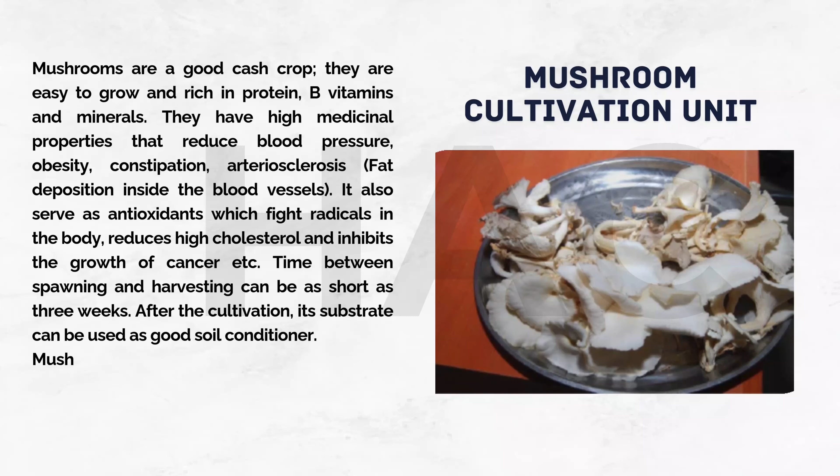Time between spawning and harvesting can be as short as 3 weeks. After the cultivation, its substrate can be used as a good soil conditioner. Mushrooms are the richest source of vegetable protein.

Photography and Media Unit. Photography and media is a skill that deals with people's life. It gives details of happenings around the world through pictures and videos. As a business entity, it covers any event and keeps record of them. Few among the activities under this media unit are photo shoot, video coverage for any event, photo book and photo frame production, newscast and documentary production.

Textile Design Unit. This unit is saddled with the responsibility of training students on screen printing and production of tie and dye materials for sale within the school community. Textile design is diverse and has many branches such as resist pattern cloth, tie and dye, batik and adire, screen printing, reverse applique, quilt making, patchwork, garment making, tailoring and spinning, knitting and woven fabrics.

This unit also produced Kampala for staffs, batik for Wapoga Games, souvenirs for Texas Tech USA Tour, USAID/Winrock programs, printing on departmental lab coats, and other screen printing contracts.

Crocheting Unit. This unit trains students on skills in making cardigans and other related wares. It also contributes in the generation of IGR for the Polytechnic at large through its production of customized school cardigans for staff and school pupils. It promotes self-reliance as students that have adequate knowledge of it can easily establish themselves instead of remaining idle, thereby waiting to acquire government jobs.

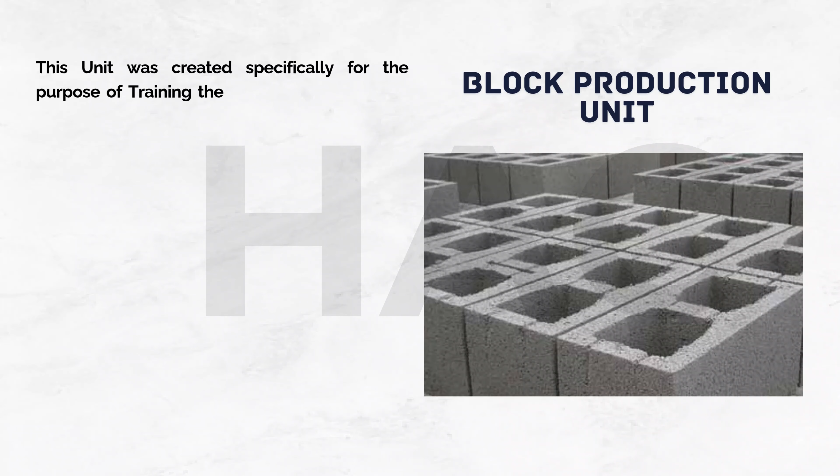Block Production Unit. This unit was created specifically for the purpose of training the students in the aspect of block production for sales, with the view of making them self-employed in the nearest future. It equips the students with basic skill to build up their practical experience in the aspect of proper molding of blocks that will always stand the test of time.

This block production unit, if given adequate financial backing with some fundamental management regulations put in place, can be a good source of internally generated revenue, IGR, for the Polytechnic at large. This is achievable if the underlisted measures are well established.

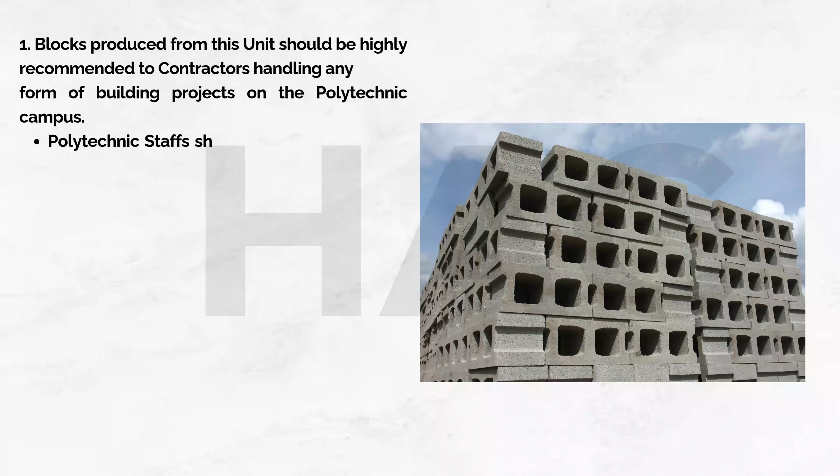Blocks produced from this unit should be highly recommended to contractors handling any form of building projects on the Polytechnic campus. Polytechnic staffs should be encouraged and allowed to patronize the Polyblock with a flexible mode of payment to attract more customers.

A delivery tipper van that can efficiently load sand from the bush should be procured for this unit. This will give the unit free access to source and transport sharp sand materials freely instead of purchasing it at high cost from local suppliers. This will greatly reduce the overall cost of purchasing sharp sand for the production, thereby enhancing our profit margin.

Olusegun Obasanjo Center for Engineering Innovation. The center was established in 2002 as a center of excellence by the then Education Trust Fund (ETF) to make great impact in the world of engineering technology.

The completed project was commissioned by the then Honorable Minister of Education, Professor Babalola Borishade, on the 16th of May, 2003. The sole objective of the center was to copy and transfer technology at all levels, produce equipment and machines by using a larger percentage of locally sourced materials, thereby promoting homemade products.

Students' industrial training is also of paramount priority to its objectives. Olusegun Obasanjo Center for Engineering Innovation was born out of the need for making engineering practices closer and available to the people. It was named Center for Engineering Innovation in order to cover a wide scope in the field of engineering practice. It inculcates engineering practices and ethics into prospective students and trainees towards quality delivery of engineering products.

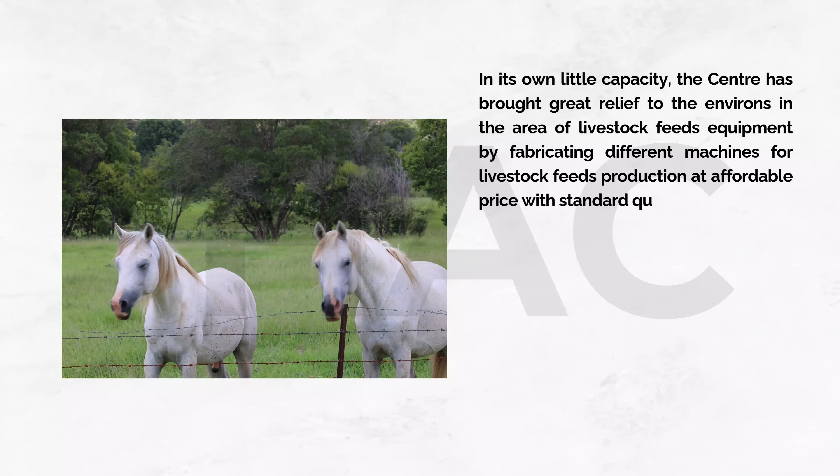Among the livestock feed processing machines that can be and has been successfully fabricated at this center are listed below: feed mixer machine, vertical and horizontal, hammer mill machine, pulverizing machine, pelletizing machine.

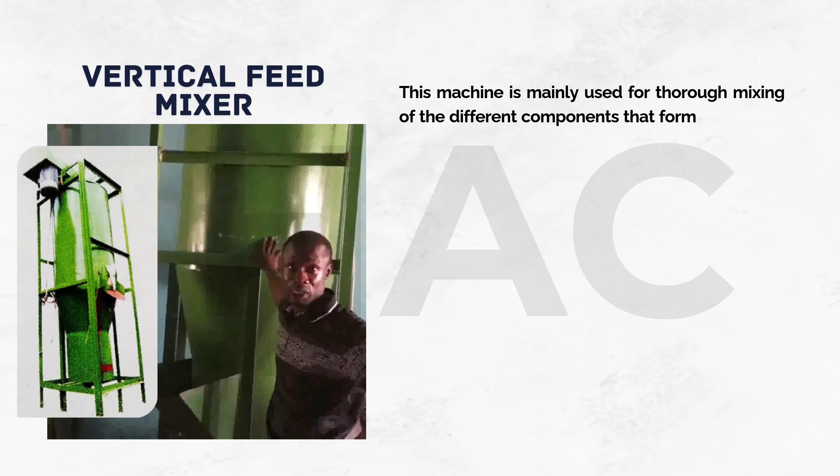Vertical feed mixer. This machine is mainly used for thorough mixing of the different components that formulate both fish and livestock feeds.

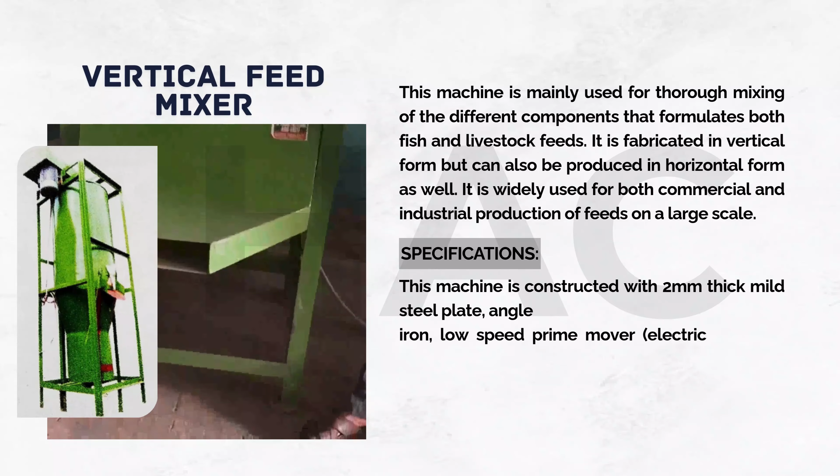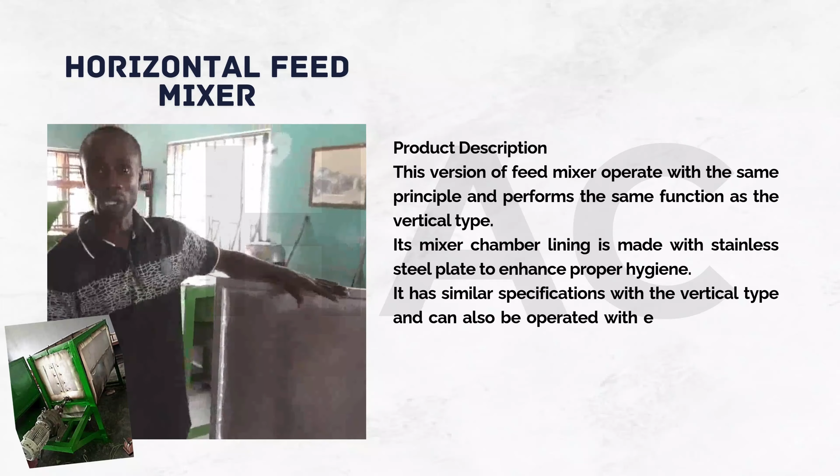Horizontal feed mixer. This version of feed mixer operates with the same principle and performs the same function as the vertical type. Its mixer chamber lining is made with stainless steel plate to enhance proper hygiene. It has similar specifications to the vertical type and can also be operated with either an electric motor or a petrol engine of required power rating.

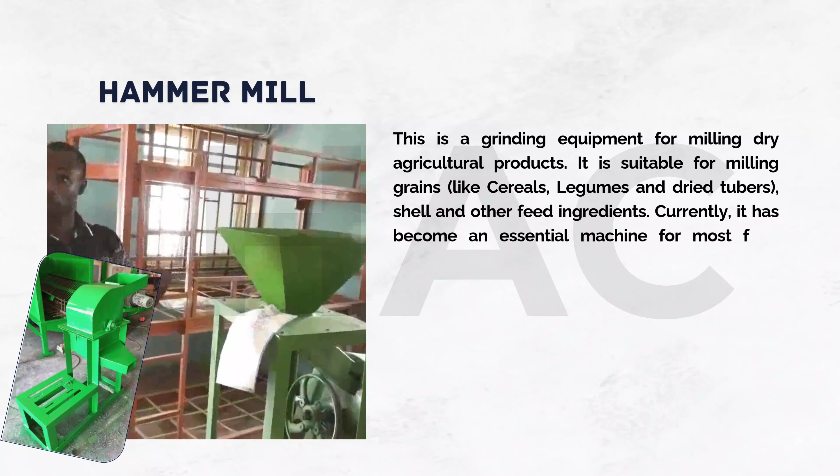Hammer mill. This is a grinding equipment for milling dry agricultural products. It is suitable for milling grains like cereals, legumes, dried tubers, shell and other feed ingredients. Currently, it has become an essential machine for most feed factories, powdered food producers, etc. This machine is fabricated with 8 mm thick mild steel plate, angle iron, square pipe, etc. Its production capacity is 5 tons per day.

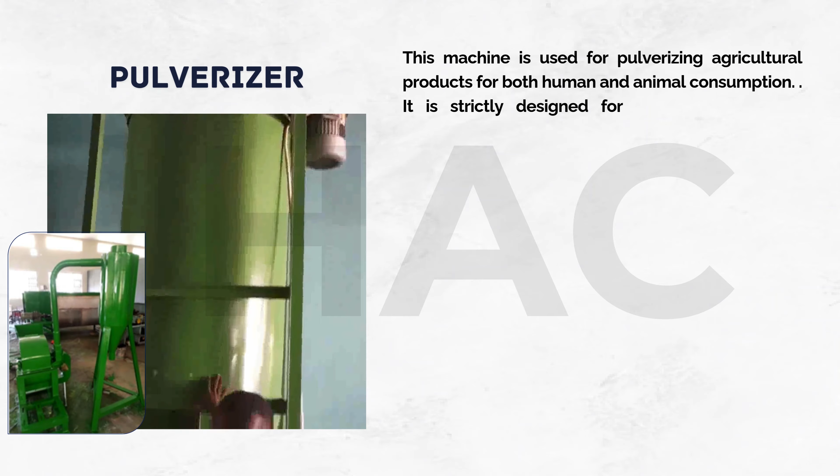Pulverizer. This machine is used for pulverizing agricultural products for both human and animal consumption. It is strictly designed for dry product and is currently the most suitable for the production of fine pulverized flour. This machine, by virtue of its efficiency, has become a must-have for most flour milling factories, individuals, and several other commercial pulverized flour-producing outfits. It is constructed with 3 mm thick mild steel plate, angle iron, fine mesh, and mild steel round pipe. It is incorporated with a high-speed electric motor and a powerful blower for efficient output delivery. It has a loading capacity of 20 kg and a delivery capacity of 2 tons per day.

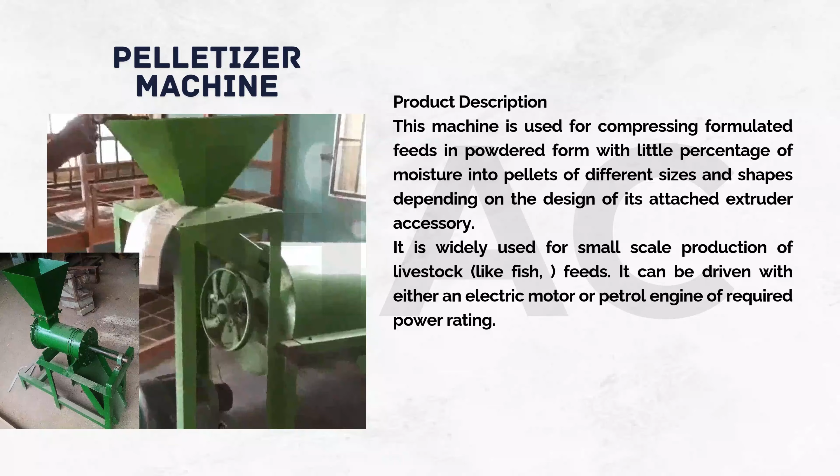Pelletizer machine. This machine is used for compressing formulated feeds in powdered form with a little percentage of moisture into pellets of different sizes and shapes, depending on the design of its attached extruder accessory. It is widely used for small-scale production of livestock feeds, like fish feeds. It can be driven with either an electric motor or petrol engine of required power rating. This machine is fabricated with thick mild steel plate, angle iron, quality bearings and strong shaft.

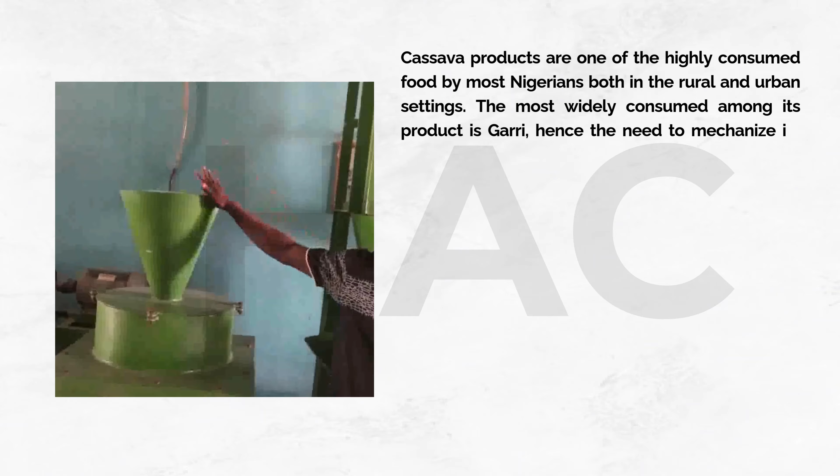Cassava processing. Cassava products are one of the highly consumed foods by most Nigerians, both in the rural and urban settings. The most widely consumed among its products is garri. Hence, the need to mechanize its production process for adequate supply to sustain the nation's population demand and promote exportation values for national economic growth at large. Among the cassava processing machines that have been successfully fabricated in this center are listed below: cassava grating machine, cassava chipping machine, cassava mash pressing machine, and garri fryer.

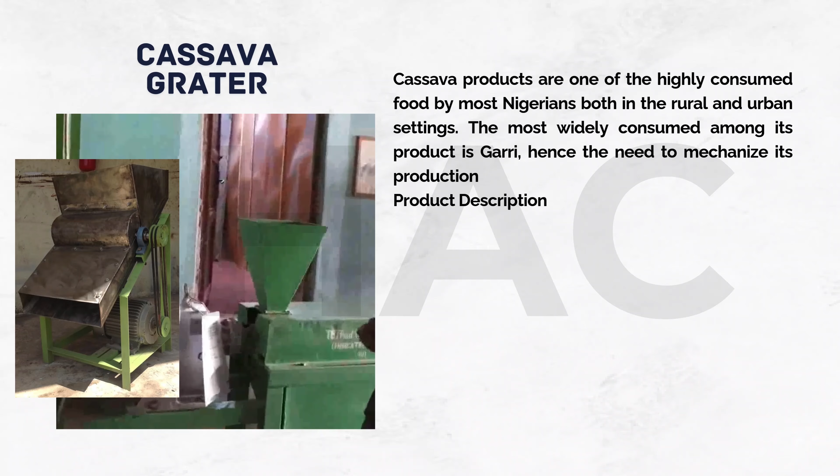Cassava grater. This machine is a modern advancement for the replacement of the manual process of grating cassava tuber by rubbing it against sharp edges of perforated holes. It is mainly used during the production of garri. For proper hygiene and longer lifespan, the grating compartment of the machine is fully fabricated with stainless steel plate to avert any chance of contamination, especially due to iron rust. This machine is fabricated with stainless steel plate, thick angle iron, square pipe, and is incorporated with an electric motor. Its production capacity is 2 tons per hour.

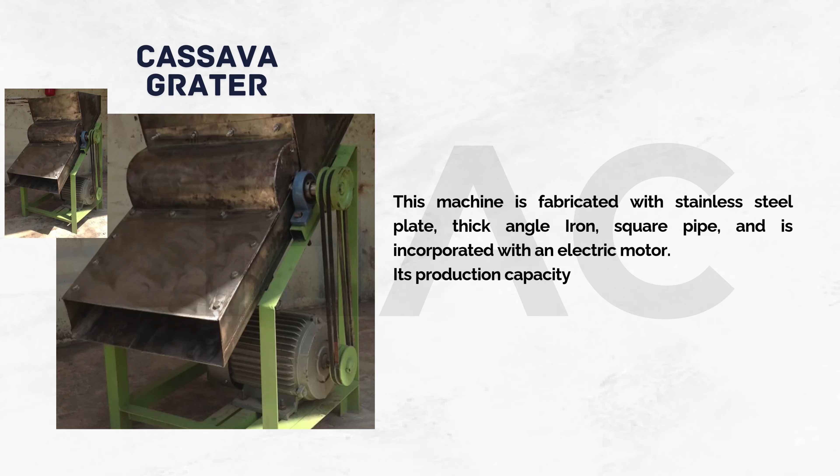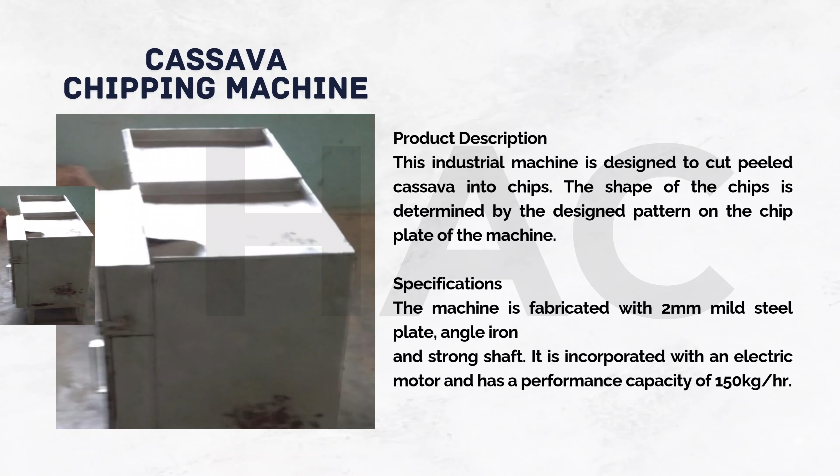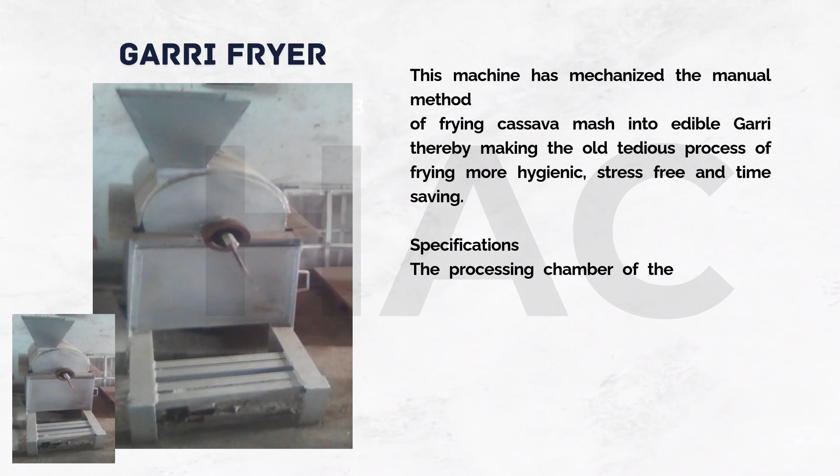This machine has mechanized the manual method of frying cassava mash into edible garri, making the old tedious frying process more hygienic, stress-free, and time-saving. The processing chamber is fully fabricated with stainless steel plate to eradicate the menace of interior rusting, which sometimes occurs with mild steel plate and causes contamination. The machine has a production capacity of 100 kg per hour.

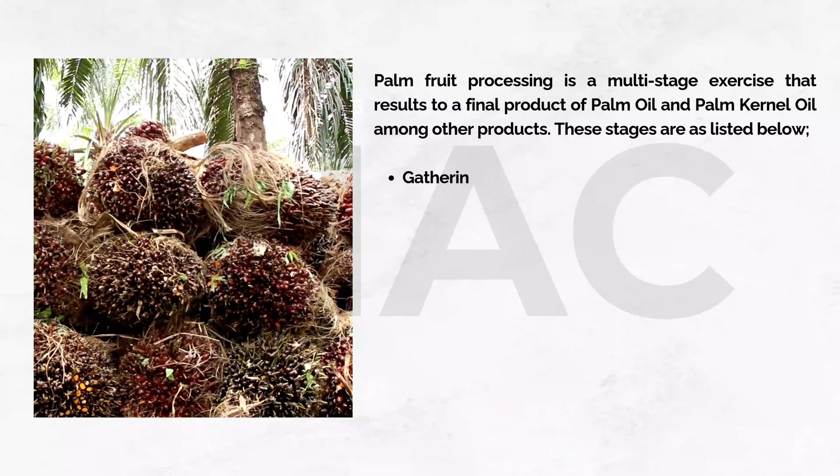Palm fruit processing is a multi-stage exercise that results in palm oil, palm kernel oil, and other products. The stages are: gathering fresh palm fruit bunches from the field, removal of palm fruits from the branches, threshing, sterilization of the bunches, digestion of the palm fruit, pressing to extract palm oil from the digested fruit, clarification and drying of the extracted oil, oil storage, and recovery of palm kernel for further processing to generate palm kernel oil.

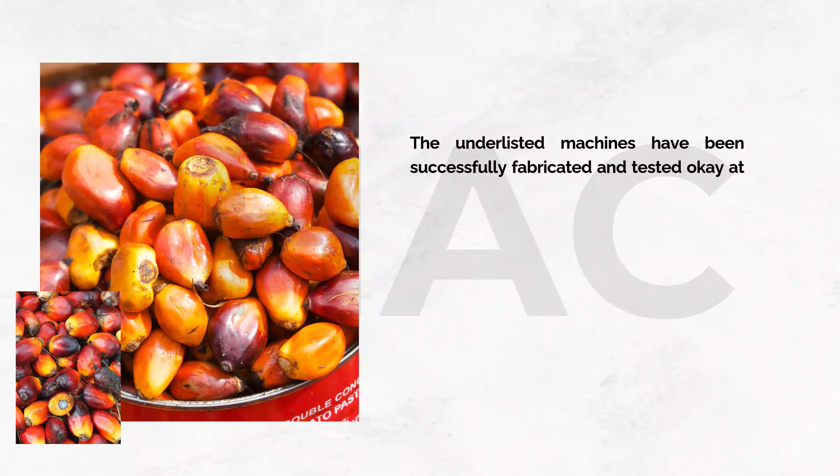The following machines have been successfully fabricated and tested at this center for palm fruit processing: palm fruit digester, palm kernel oil (PKO) expeller, palm oil clarifier, palm oil pressing machine, palm nut sterilizer machine, palm kernel shell separator machine, and palm nut cracking machine.

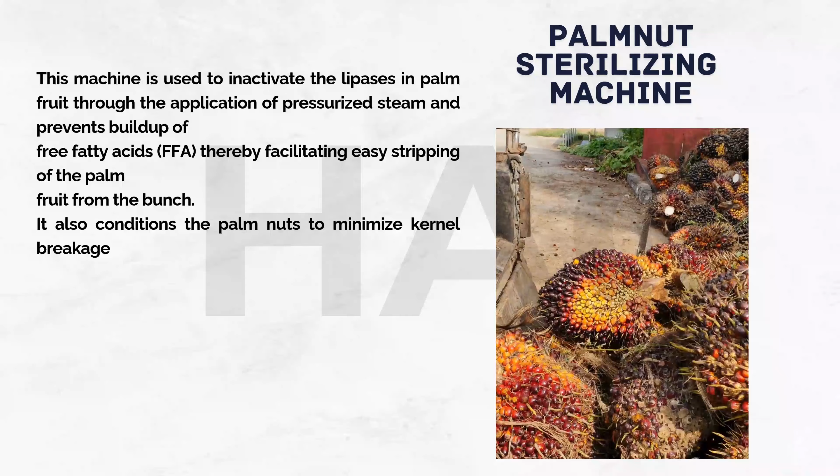Palm nut sterilizing machine: this machine is used to inactivate the lipases in palm fruit through the application of pressurized steam and prevents buildup of free fatty acids (FFA), thereby facilitating easier stripping of the palm fruit from the bunch. It also conditions the palm nuts to minimize kernel breakage and softens the fruit mesocarp for easy digestion and release of oil. It is fabricated with 3mm thick stainless steel plate, 2-inch angle iron, 2mm thick mild steel plate, pressure gauge, etc., and has a capacity of sterilizing 70 kg of palm fruit per hour.

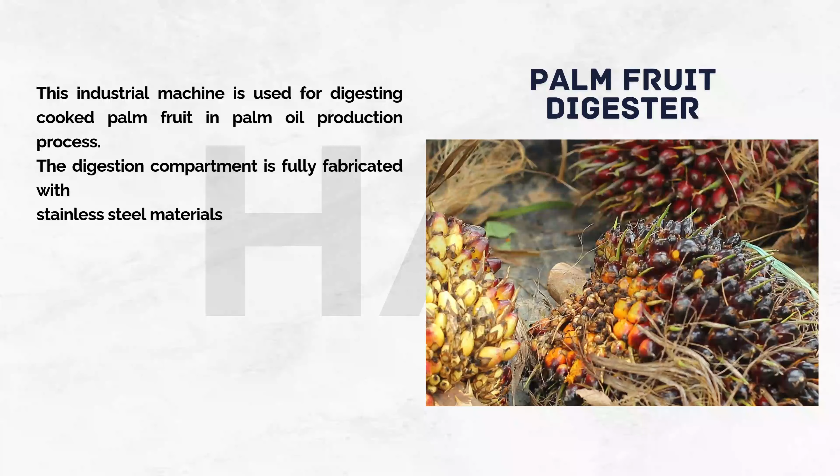Palm fruit digester: this industrial machine is used for digesting cooked palm fruit in the palm oil production process. The digestion compartment is fully fabricated with stainless steel materials to enhance proper hygiene. The machine can be driven with an electric motor or petrol engine, especially in remote areas, and is fabricated with thick stainless steel plate, fine mesh, angle iron, and electric motor, among other components.

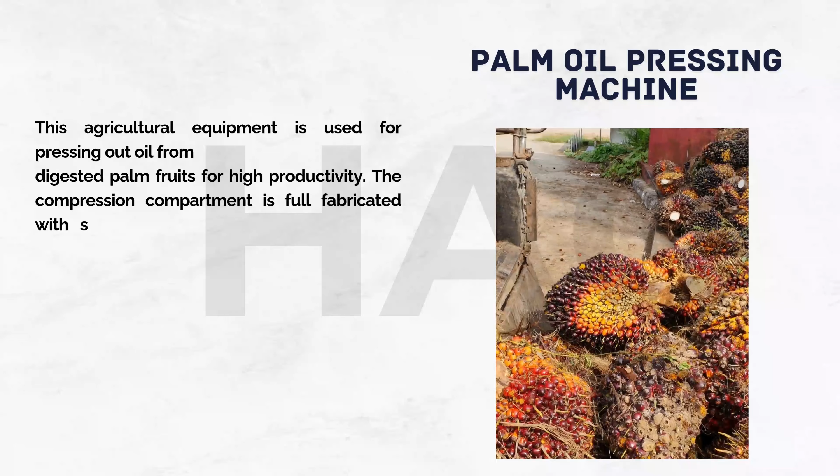Palm oil pressing machine: this agricultural equipment is used for pressing out oil from digested palm fruit for high productivity. The compression compartment is fully fabricated with stainless materials to enhance proper hygiene. The equipment is fabricated with 5mm thick stainless steel plate and mild steel U-channel iron, and is incorporated with a standard pressure gauge, hydraulic press, and a low-speed electric motor.

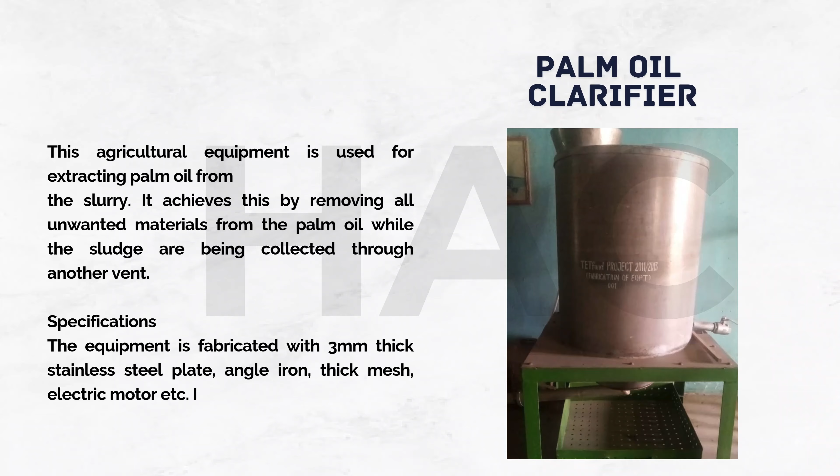Palm oil clarifier: this agricultural equipment is used for extracting palm oil from the slurry. It achieves this by removing all unwanted materials from the palm oil while the sludge is collected through another vent. The equipment is fabricated with 3mm thick stainless steel plate, angle iron, thick mesh, electric motor, etc., with a production capacity of 2 tons per day.

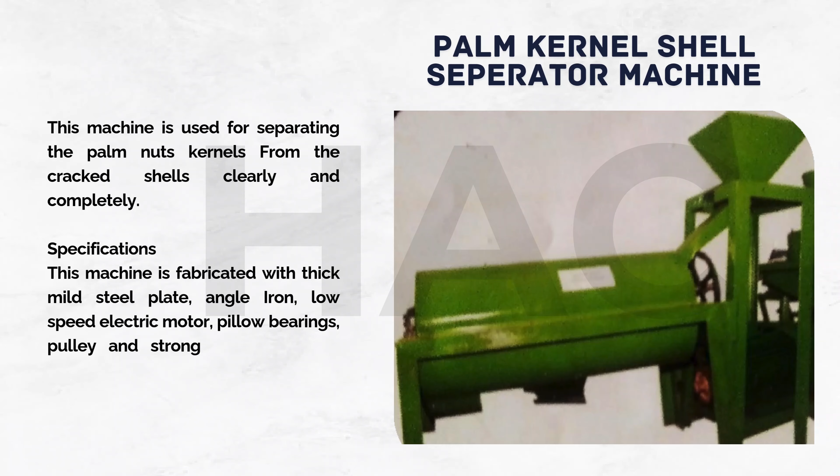Palm kernel shell separator machine: this machine is used for separating the palm nut kernel from the cracked shells clearly and completely. It is fabricated with thick mild steel plate, angle iron, low-speed electric motor, pillow bearings, pulley and strong shaft, and has a production capacity of about 300 kg per hour.

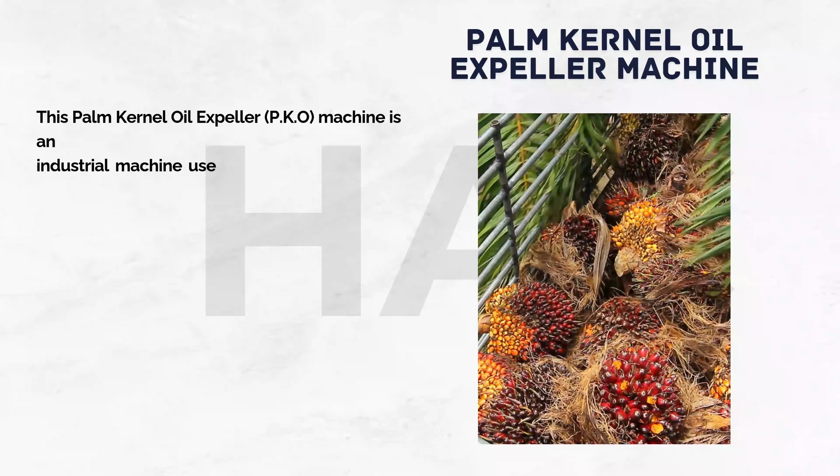Palm kernel oil expeller machine: this industrial machine is used for expelling oil from palm kernel seed, performing both squeezing and expelling tasks simultaneously. It is fabricated with thick mild steel plate, angle iron, quality bearings, and pulley, and is incorporated with an electric gear motor for efficient speed control, with a production capacity of 2.5 tons per day.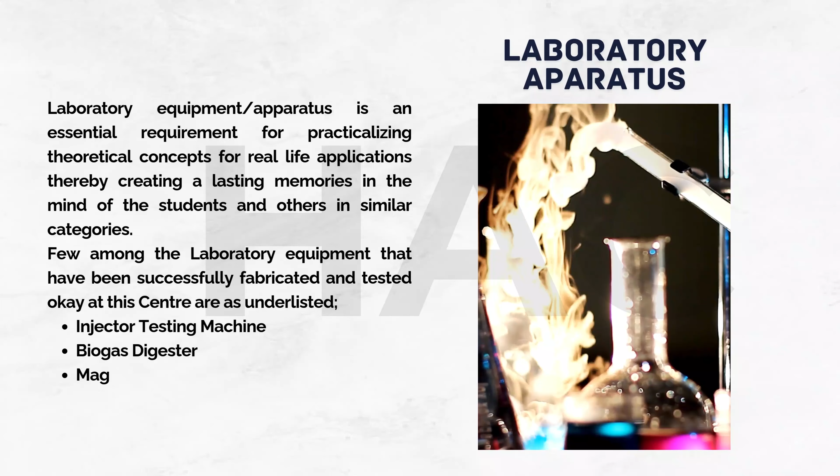Laboratory apparatus: laboratory equipment is an essential requirement for practicalizing theoretical concepts for real-life applications, creating a lasting memory in the minds of students and others in similar categories. Among the laboratory equipment successfully fabricated and tested okay at this center are: injector testing machine, biogas digester, Magnus truss apparatus, and plastic bending of portal frame (PBOPF) apparatus.

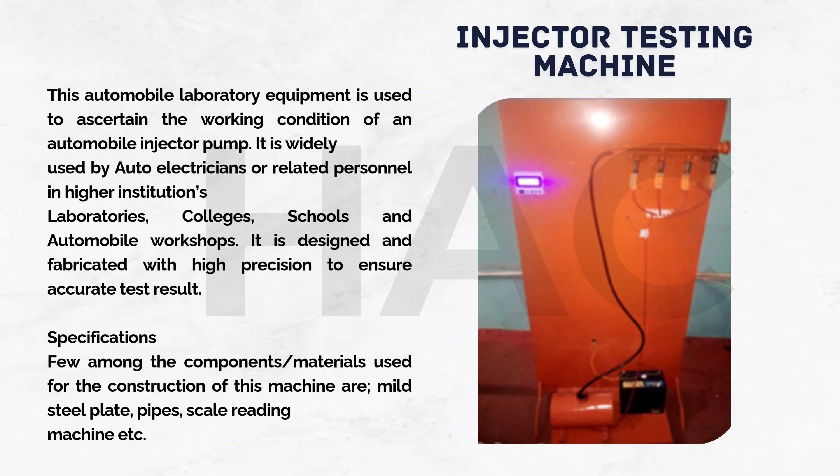Injector testing machine. This automobile laboratory equipment is used to ascertain the working condition of an automobile injector pump. It is widely used by auto electricians or related personnel in higher institutions, laboratories, colleges, schools, and automobile workshops. It is designed and fabricated with high precision to ensure accurate test results. Few among the components and materials used for construction of this machine are mild steel plate, pipes, scale reading machine, etc.

Biogas digester. This apparatus is exclusively used to convert wastes into domestic cooking gas. It is designed for laboratory experimentation of biogas production from animal waste products like cow dung, human feces, etc. It is fabricated with 1mm mild steel plate, pressure gauge, angle iron, among other components.

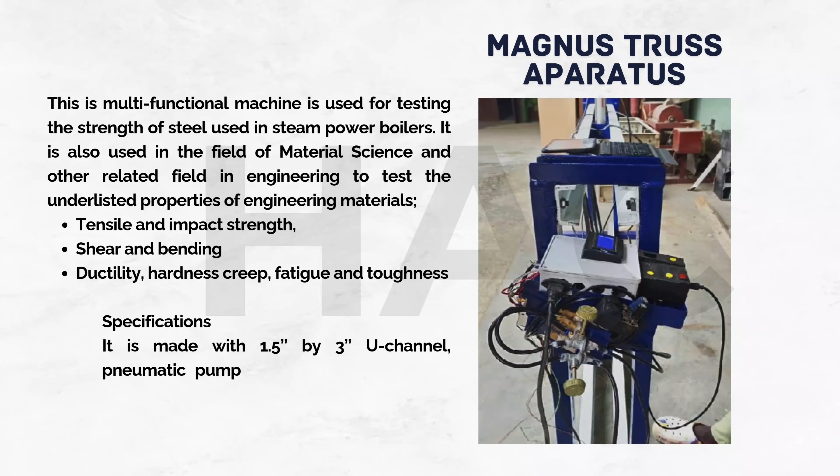Magnus Truss apparatus. This multifunctional machine is used for testing the strength of steel used in steam power boilers. It is also used in the field of material science and other related fields in engineering to test the underlisted properties of engineering materials: tensile and impact strength, shear and bending, ductility, hardness, creep, fatigue, and toughness. It is made with 1.5 by 3 U-channel, pneumatic pump, electronic control panel, EMC, etc.

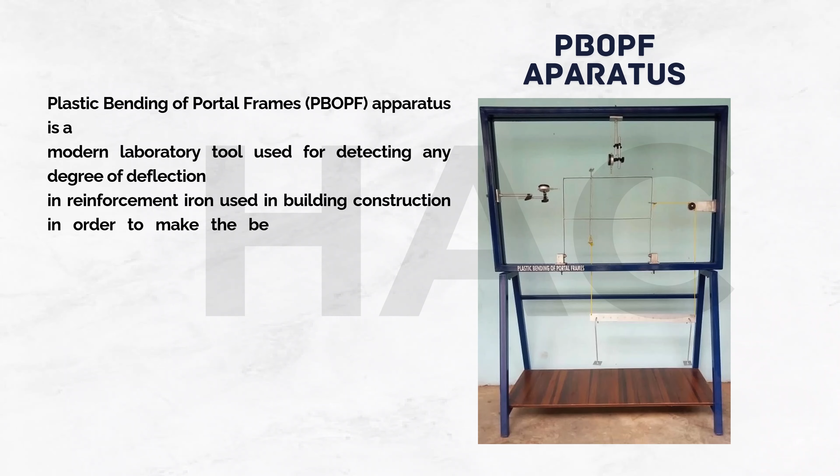PBOPF apparatus. Plastic bending of portal frames, PBOPF apparatus, is a modern laboratory tool used for detecting any degree of deflection in reinforcement iron used in building construction, in order to make the best choice of material specification. It features 3mm by 25 black mild steel portals, loading capacity of 0 to 300 newtons, digital dial gauge with 25.4mm travel and 0.01mm resolution, and a supporting frame of 38.1mm by 1.2mm square pipe.

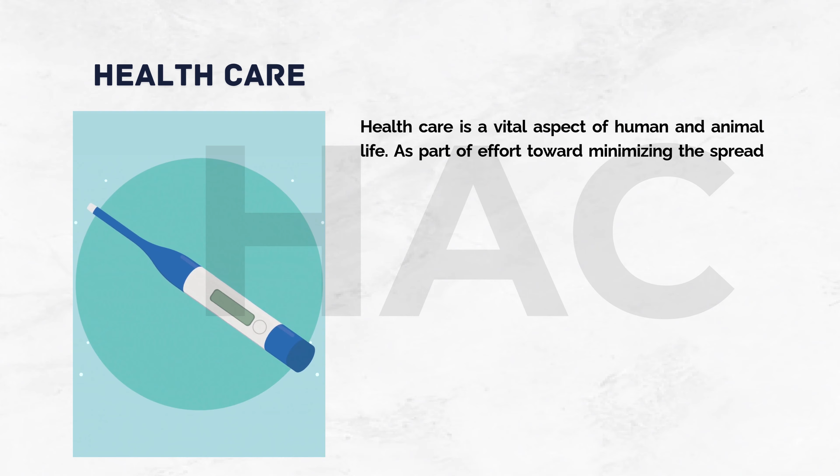Disinfecting machine, dust extractor, hand washing machine, pedal operated.

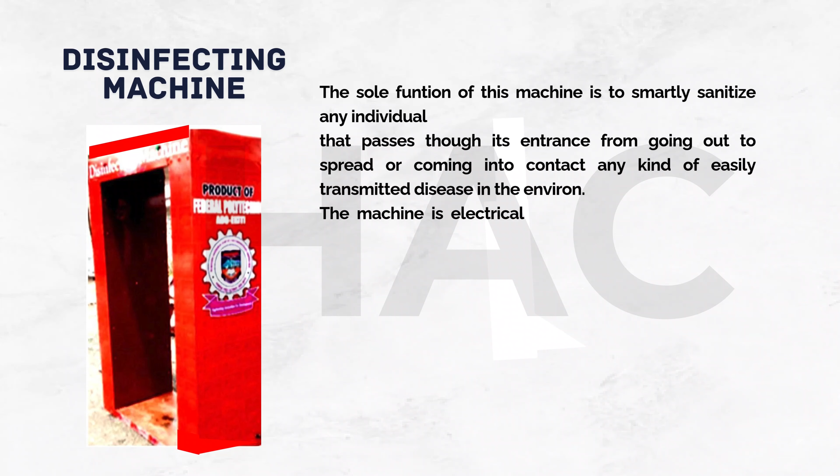Disinfecting machine. The sole function of this machine is to smartly sanitize any individual that passes through its entrance, preventing them from going out to spread or coming into contact with any kind of easily transmitted disease in the environment. The machine is electrically powered and can be operated with other power sources like solar inverter. It is constructed with the following materials: 20mm thick mild steel plate, highly sensitive thermometer, electric pump and sensor, sanitizing and disinfecting agents, with quality surface finishing. It has a capacity of disinfecting 1,000 people before exhausting a full reservoir of its reagent.

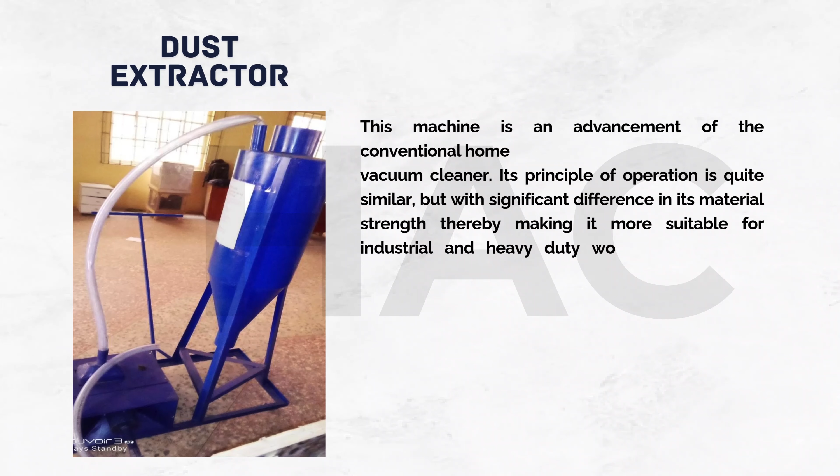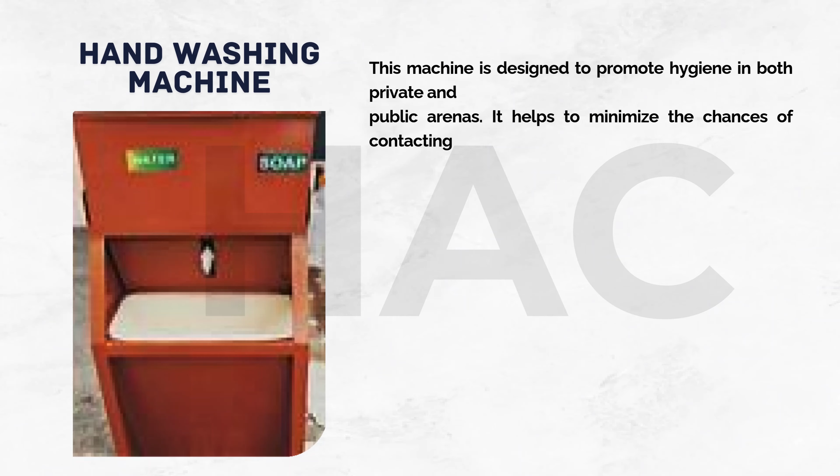Hand washing machine. This machine is designed to promote hygiene at both private and public arenas. It helps to minimize the chances of contacting communicable infections that could easily be transmitted by mere hand touch. It is widely used in financial institutions, academic institutions, hospitals, industries, and several commercial outfits. This machine is fabricated with 1.5mm thick mild steel plate, angle iron, flat bar, plastic tap, among other plumbing materials. It is also equipped with soap, sanitizing reagent, and water reservoirs. Its functional capacity is unlimited for as long as the reservoirs of contents are regularly replenished.

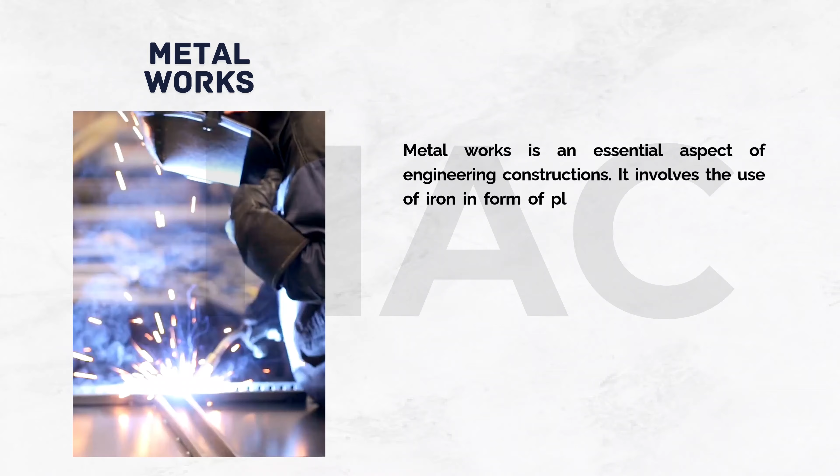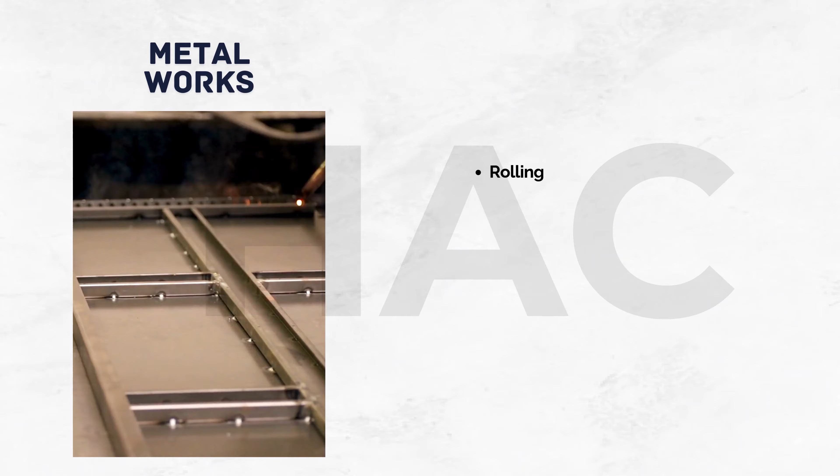Rolling machine, crucible furnace, rotary furnace, triple bed bunk, double bed bunk, security door or gate, cantilever shed, rock cutting machine.

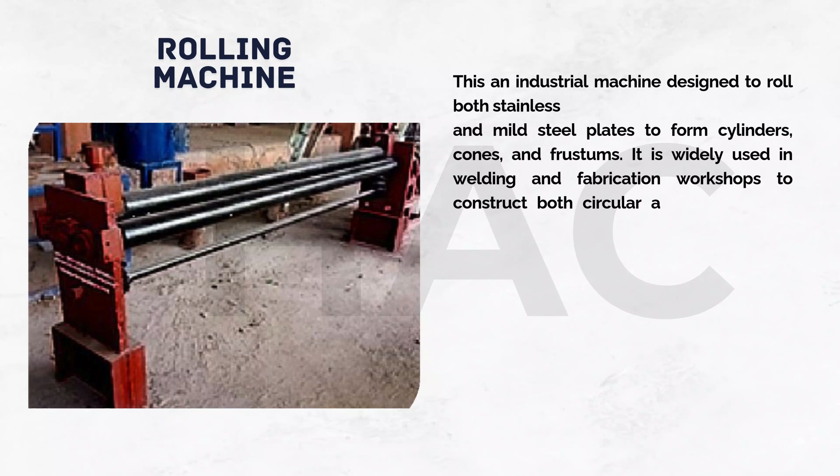Rolling machine. This is an industrial machine designed to roll both stainless and mild steel plates to form cylinders, cones, and frustums. It is widely used in welding and fabrication workshops to construct both circular and semi-circular rolling. The machine is made with 50mm thick mild steel plate, 20mm thick pipe, bearings, electric gear motor, gear couplings, etc.

It has a capacity of rolling up 5 mm thick plate.

Cantilever shed: this is designed basically to provide covering or shed for people and other valuable things from direct rainfall or sunshine. It can also be constructed for additional purposes like installation of solar panels. This cantilever shed is constructed with 6-inch H-channel, angle iron, galvanized pipe, aluminium sheet, etc.

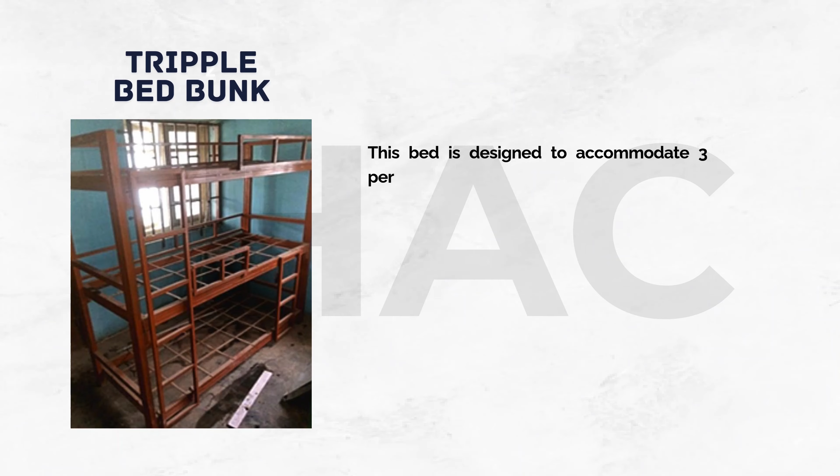Triple bed bunk: this bed is designed to accommodate 3 persons at a time, but on different mattresses. It is useful as students' bunk in schools, colleges, and higher institution hostels. It could be used in camps, churches, and mosque hostels. This bed is fabricated with 1 and 1.5 inch square pipe, flat bar, bolts, and nuts.

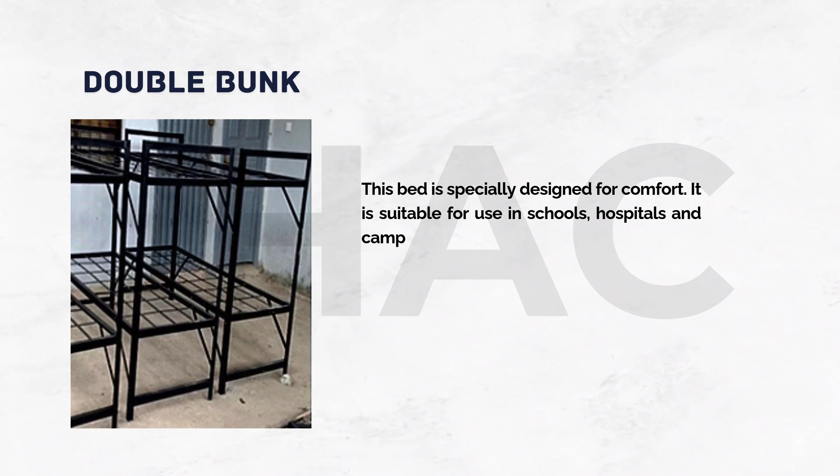Double bunk: this bed is specifically designed for comfort. It is suitable for use in schools, hospitals, and campgrounds. It is fabricated with mild steel angle iron, square pipe, flat bar, springs, hinges, etc.

Security door: these metal products are fundamentally used to secure lives and properties in households, schools, factories, farm plantations, markets, other commercial outfits, recreation centers, etc. This door and gates are fabricated with 3 mm mild steel plate, thick 1.5 by 3 pipe, 3/4 square pipe, designed pattern mild steel plate, quality locks, and strong hinges. It is coated with quality gloss paint for good surface finishing.

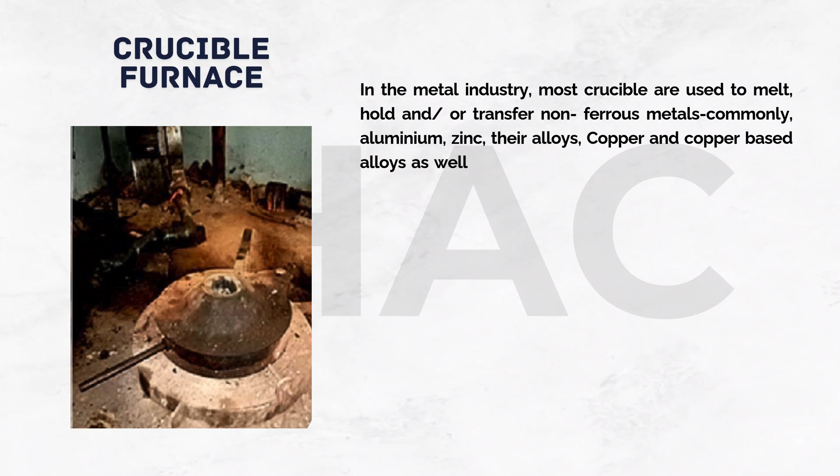Crucible furnace: in the metal industry, most crucibles are used to melt, hold, and/or transfer non-ferrous metals, commonly aluminium, zinc, their alloys, copper, and copper-based alloys, as well as precious metals. A crucible furnace is the least expensive melting method, preferred for melting small volumes of non-ferrous metals. Crucible furnaces are used for melting and holding small batches of non-ferrous alloys. It is one of the oldest and simplest types of melting furnace used in the foundry.

The furnace uses a refractory crucible which contains the metal charge. The charge is heated via conduction of heat through the walls of the crucible. The heating fuel used by the crucible furnace is typically coke, oil, gas, or electricity. The crucible furnace is made of ceramic bricks sunk into a pit to form a pipe-like shape with a cover. It has a blower which passes an air or oil mixture into it for firing. It is capable of withstanding a temperature of about 1000 degrees Celsius.

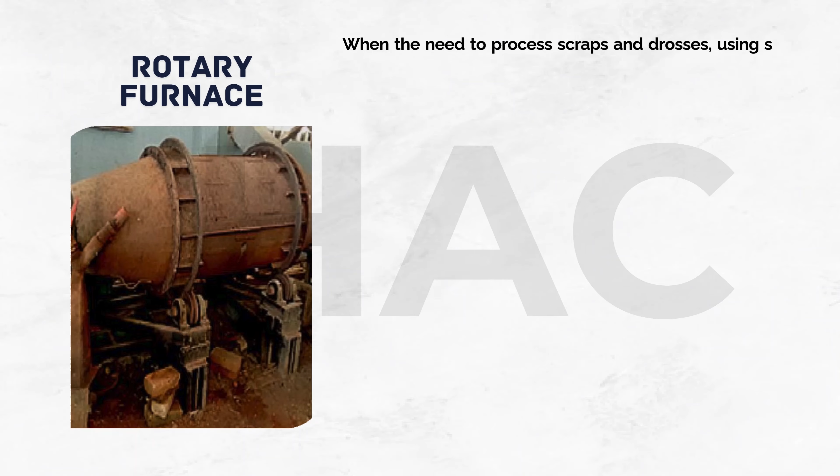Rotary furnace: when the need to process scraps and dross using salt flux arises, this equipment is the answer for heating and melting operations, particularly for precast. The ratio of the salt flux to the contained oxide in the resulting byproduct is different. Two modes of operation are common: wet and dry, with the difference being the amount of salt flux added and the rheological consistency of the molten black dross.

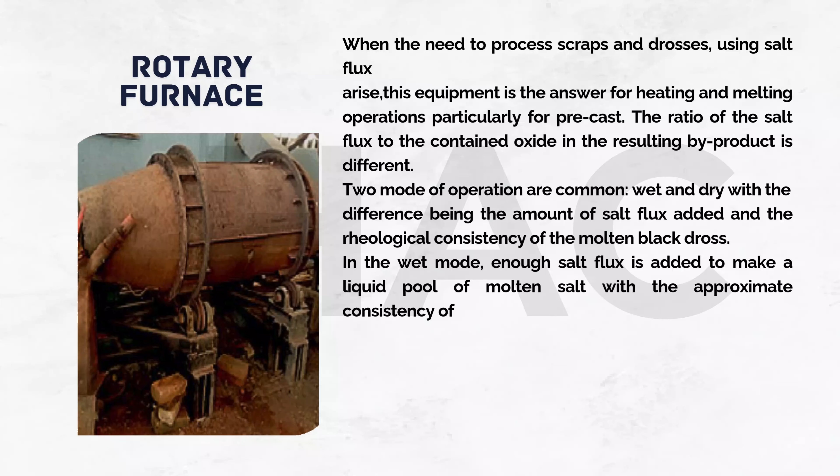In the wet mode, enough salt flux is added to make a liquid pool of molten salt with the approximate consistency of water. This furnace is made of ceramic bricks, 3 mm mild steel plate, 20 mm rod, gear motor, etc. It can withstand a temperature of about 1600 degrees Celsius.

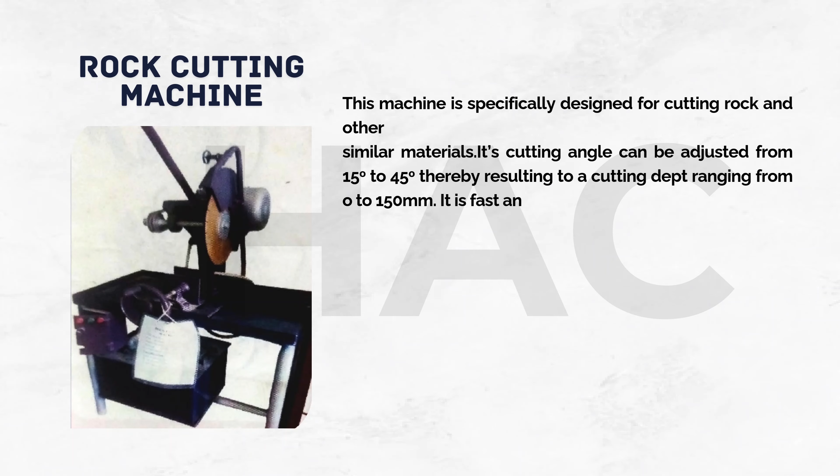Rock cutting machine: this machine is specifically designed for cutting rock and other similar materials. Its cutting angle can be adjusted from 15 degrees to 45 degrees, thereby resulting in a cutting depth ranging from 0 to 150 mm. It is fast and very convenient to use.

It is fabricated with mild steel iron in different forms, incorporated with a high-speed electric motor, and its cutter is made up of high carbon steel with a maximum resistance temperature of about 250 degrees Celsius. The machine has a non-slip auxiliary handle, stable X and Y axis grip when cutting, and convenient grooving for cutting.

Household energy prepaid meter: this electronic device is designed to determine, control, and monitor the amount of electrical energy usage in residential buildings, offices, and medium-scale commercial outfits, etc. Among its numerous features are an online payment/recharging system via ATM card or Android mobile application, real-time update and control via Android mobile application, and recharge and used units history.

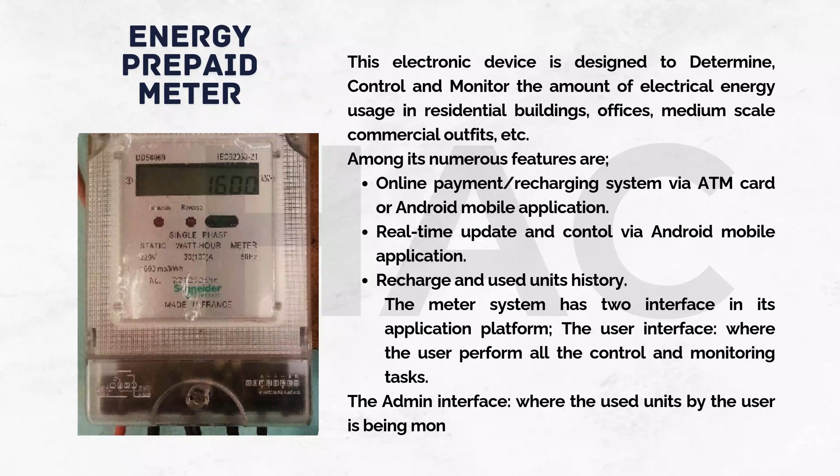The meter system has two interfaces in its application platform: the user interface, where the user performs all the control and monitoring tasks, and the admin interface, where the used units by the user are monitored by the energy provider.

With an online recharge payment method, the energy provider, that is the Federal Polytechnic Ado-Ekiti, will tender an account to the users for prompt remittance of recharge money. The tariff plan can only be changed by the apex authority of the energy provider, that is the Rector FPA, through his or her admin account.

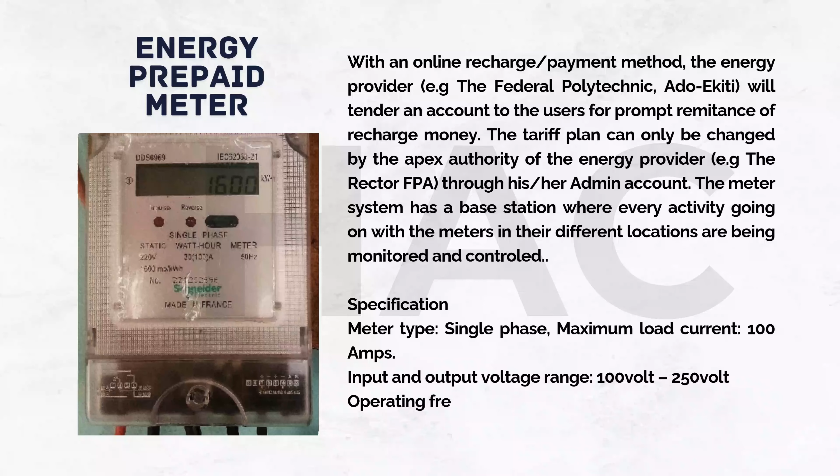The meter system has a base station where every activity going on with the meters in the different locations are being monitored and controlled. Meter type: single phase, maximum load current 100 amps, input and output voltage range 100 volt to 250 volt, operating frequency 50 Hz, 5 kVA voltage stabilizer.

This household appliance is basically used to maintain regulated voltage for safe operation of all of the gadgets power via its output voltage. It stabilizes and maintains a regulated output voltage for a fixed range of input voltage values. It is constructed with mild steel plate casing, voltmeter, pure copper wound transformer, switch and other electronic components. Its maximum load capacity is 5,000 watts.

File cabinet. These cabinets are designed for safekeeping and easy access of files and other related items. They are widely used in offices and homes for the said purpose. These cabinets are fabricated with 2 mm thick mild steel plate, quality lock, flat bar, and painted with top quality glossy paint for a better outlook.

Laptop table. This is a simple, lightweight, adjustable and detachable table designed for house and office use as laptop and teacup tables. The table is constructed with 1-inch chromed round pipe, 3/4 thick medium density fiber board MDF and half thick plywood, etc.

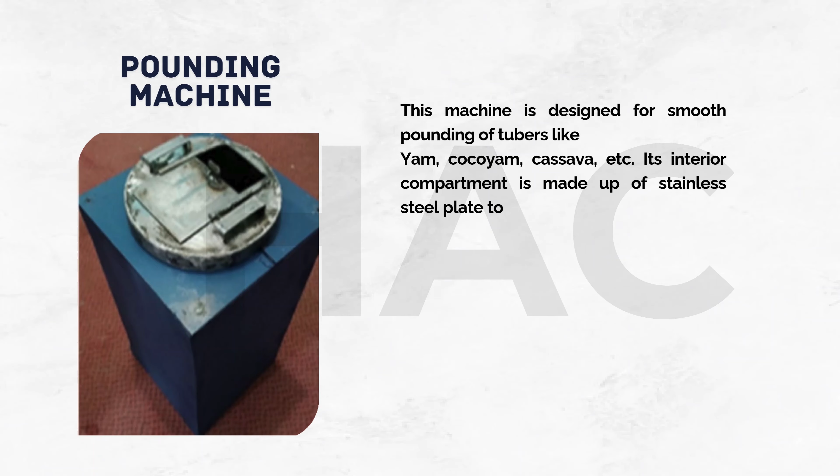Pounding machine. This machine is designed for smooth pounding of tubers like yam, cocoyam, cassava, etc. Its interior compartment is made up of stainless steel plate to avoid contamination due to iron rust. The machine is fabricated with 1.5 mm stainless steel plate, 2 mm mild steel plate, electric motor, etc. It has a capacity of producing 75 kg of smoothly pounded tuber per hour.

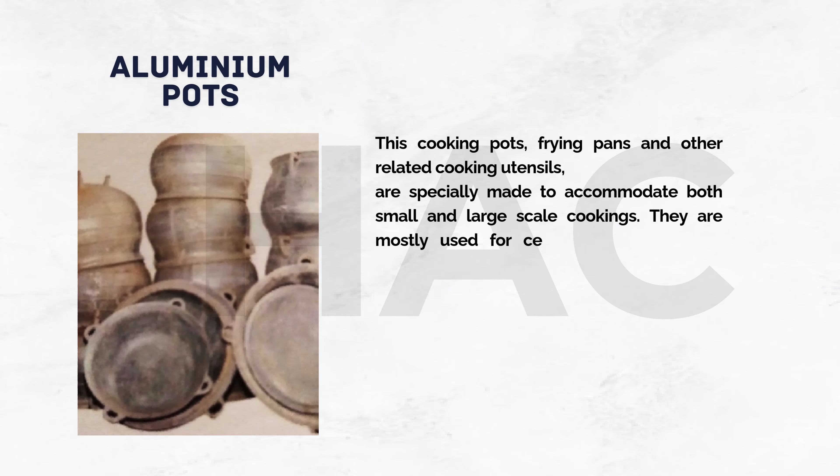Aluminium pots. These cooking pots, frying pans, and other related cooking utensils are specifically made to accommodate both small and large-scale cookings. They are mostly used for ceremonial, commercial, and other domestic cookings. They are relatively stronger, durable, and very reliable. These products are made with molten aluminium, casted into the required shapes and size from collapsible sand molds.

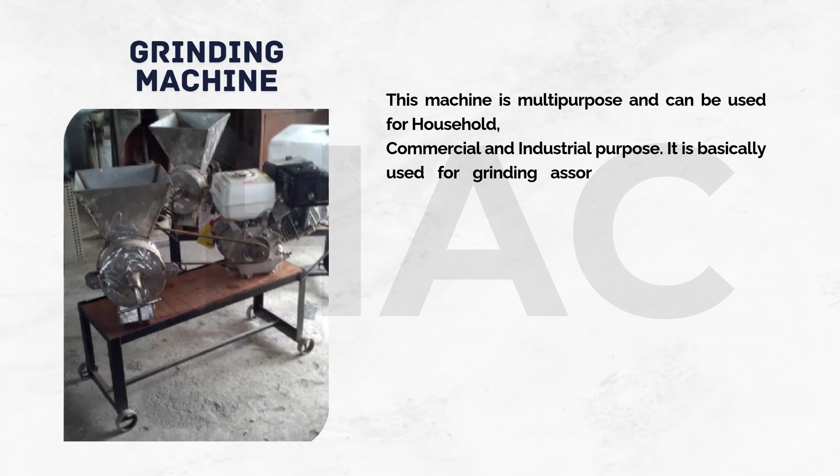Domestic machines. Grinding machine. This machine is multi-purpose and can be used for household, commercial, and industrial purpose. It is basically used for grinding assorted vegetables like pepper, tomatoes, etc., cereals like guinea corn, millet, tiger nut, etc., legumes like beans, groundnut, etc., among several agricultural produce.

This machine is fabricated with 3 mm stainless steel plate, quality bearings, pulley, and angle iron. It is incorporated with a petrol engine prime mover, but can equally be driven with electric motor.

Deep fryer. Frying large quantity of food like plantain, fish, meat, etc. is of great concern to those who engage in industrial or mass food production and processes. This led to the need for a machine capable of frying large quantity of food at a time. This machine is fabricated with 3 mm stainless steel plate, 1-inch stainless square pipe, stainless mesh, angle iron, gas burner, etc.

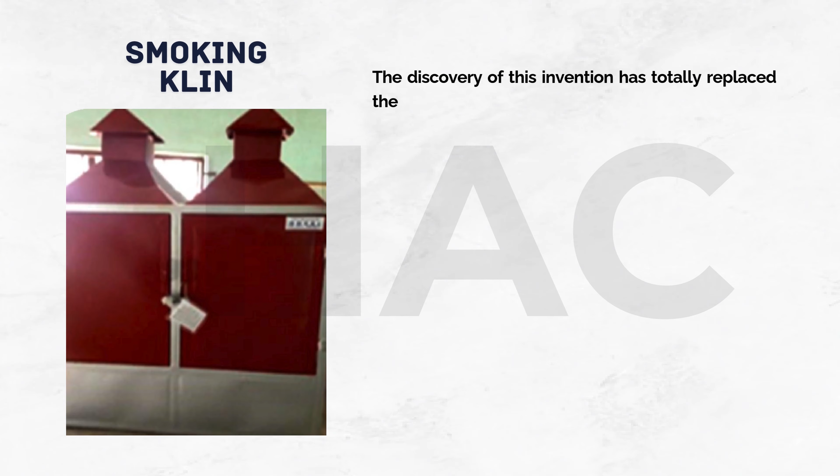Smoking kiln. The discovery of this invention has totally replaced the traditional fish smoking method with low level of hygiene. The significant advancement in this machine is its ability to eliminate smoke from contaminating the fish while making it edible. It dries the fish to the expected level for good preservation. The machine is also useful for meat preservation.

This machine can be fabricated with either stainless or mild steel, but the inner chamber must be stainless, lagged with fiber, provided with heat exchanger and chimney. It has a production capacity of about 200 kg per batch.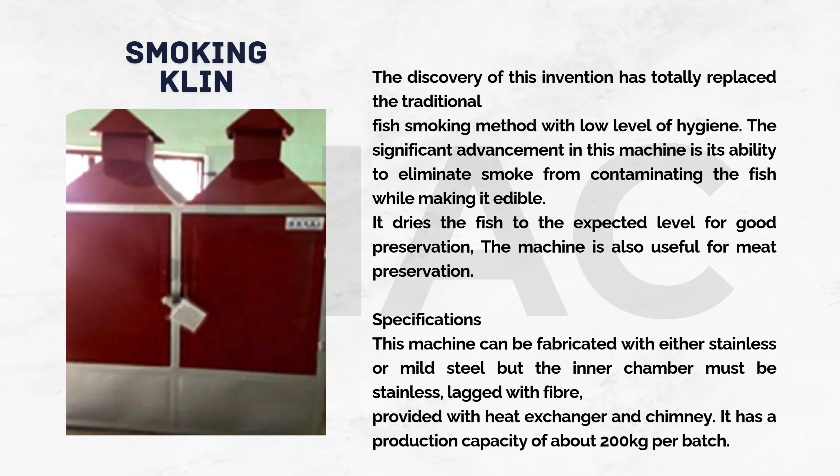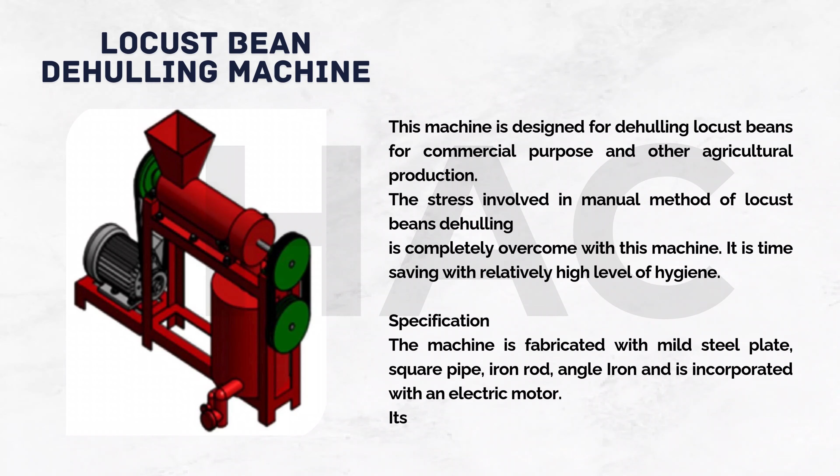Locust beans dehulling machine. This machine is designed for dehulling locust beans for commercial purpose and other agricultural production. The stress involved in manual method of locust beans dehulling is completely overcome with this machine. It is time-saving with relatively high level of hygiene. The machine is fabricated with mild steel plate, square pipe, iron rod, angle iron, and is incorporated with an electric motor. Its dehulling capacity is about 50 kg per hour.

Nylon melting machine. This machine is used in rubber and plastic industries for melting rubber granules to form pellets. The machine is fabricated with 2 mm mild steel plate, heater element, angle iron, electric gear motor, etc. Its production capacity is 50 kg per hour.

Groundnut oil expeller. This machine is designed to discharge groundnut oil by expelling the oily content in the groundnut seeds with a rotary compression mechanism. It is used for small-scale production of groundnut oil. This machine is fabricated with 2 mm thick mild steel plate, 2-inch angle iron, electric geared motor, bearings, and fine mesh. Its production capacity is approximately 45 kg per hour.

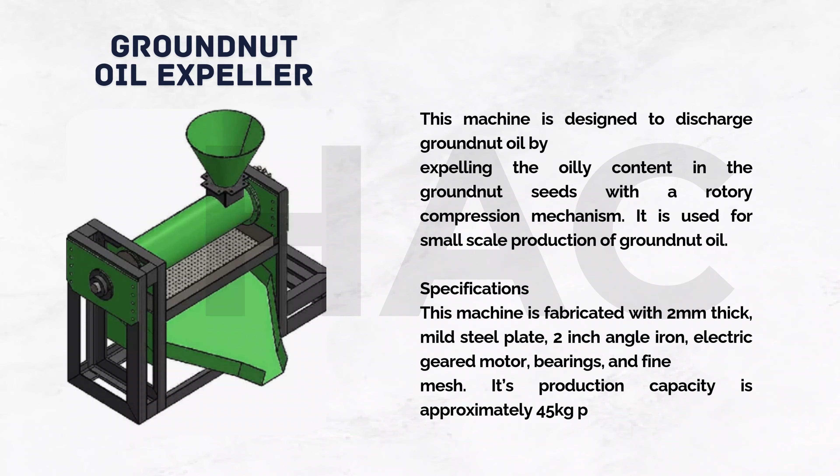Groundnut decorticator. This machine is designed to remove the groundnut seed from its outer cover or pod. It's efficient, faster, and easy to operate. This machine is fabricated with 2 mm thick mild steel plate, 2-inch angle iron, low-speed electric motor, bearings, pulley, and fine mesh. It has a capacity of decorticating about 85 kg of groundnut per hour.

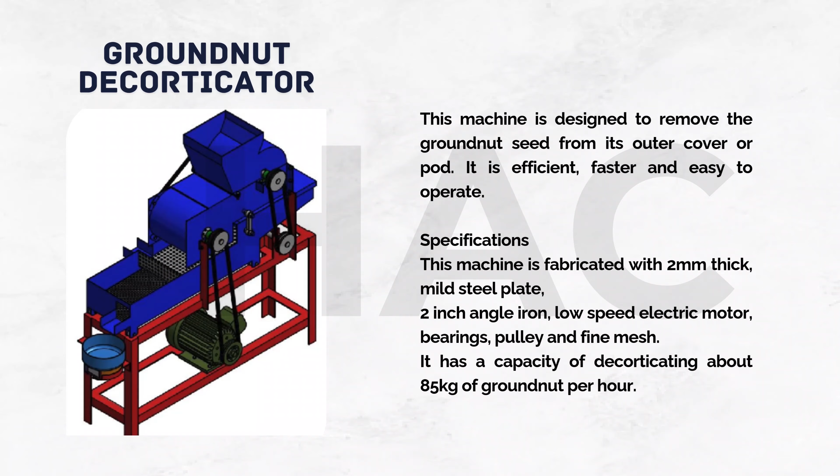Construction. Sandcrete mixer. This machine is designed for uploading sand and cement into a mixer compartment for effective mixing with water, thereby reducing the stress associated with manual mixing with shovel or spade. It is faster and quite efficient. The machine is fabricated with 3 mm thick mild steel plate, angle iron, bearings, gear, electric motor, couplings, metal chain, etc.

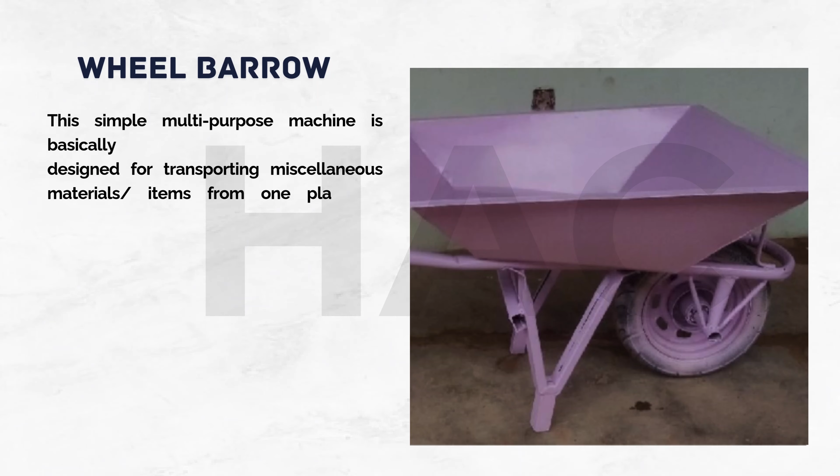Wheelbarrow. This simple multi-purpose machine is basically designed for transporting miscellaneous materials or items from one place to another. It can be used at home for domestic works, at civil engineering construction sites, markets, for hawking, etc. It is fabricated with 2 mm thick mild steel plate, 1.5-inch round pipe, bearing, and top quality tire. Its maximum design and loading capacity is about 200 kg.

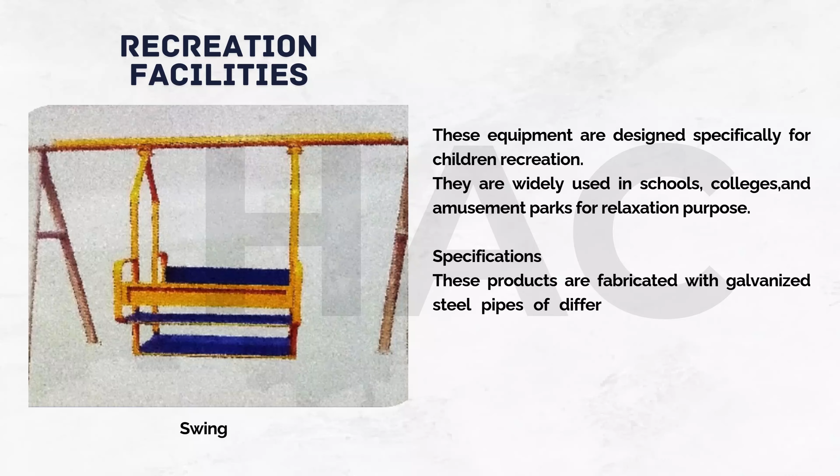Children and fun recreation facilities. These equipment are designed specifically for children recreation. They are widely used in schools, colleges, and amusement parks for relaxation purpose. These products are fabricated with galvanized steel pipes of different sizes, 2 mm thick mild steel plate, angle iron, and coated with quality paint for good outlook. It has a maximum bearing capacity of 800 kg.

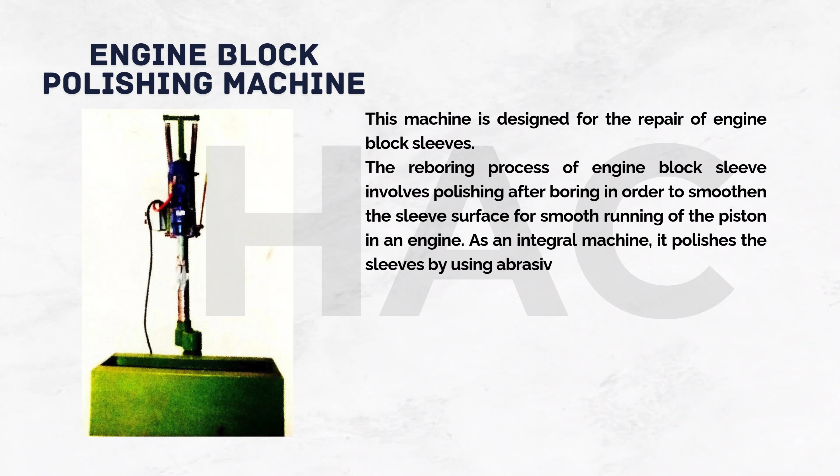Factory accessories and automobile. Engine block polishing machine. This machine is designed for the repair of engine block sleeves. The reboring process of engine block sleeve involves polishing after boring in order to smoothen the sleeve surface for smooth running of the piston in an engine. As an integral machine, it polishes the sleeves by using abrasive stones with lubricants. The machine is fabricated with 10 mm and 6 mm mild steel plate, angle iron, shaft, electric gear motor, spring, etc. Its efficiency can be rated to about 70% depending on the experience level of the operator.

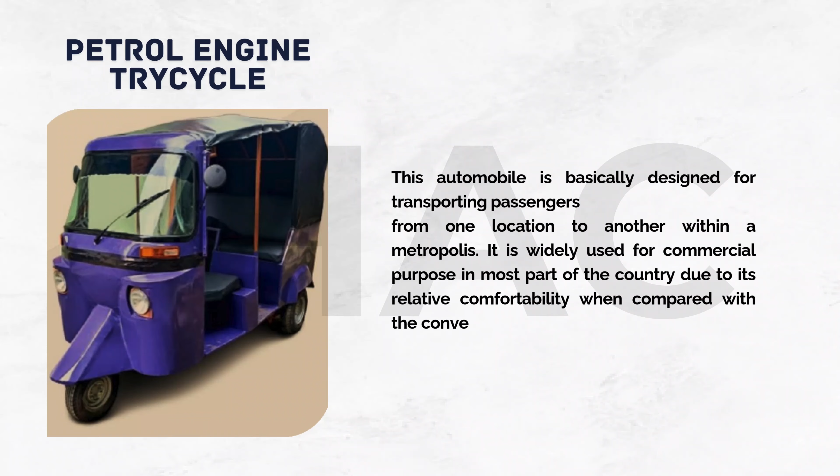Petrol engine tricycle. This automobile is basically designed for transporting passengers from one location to another within a metropolis. It is widely used for commercial purpose in most parts of the country due to its relative comfortability when compared with the conventional motorcycle popularly known as Okada. The body and chassis are fabricated with thick mild steel plate and varieties of pipes respectively. The finished products possess the following parameters and features.

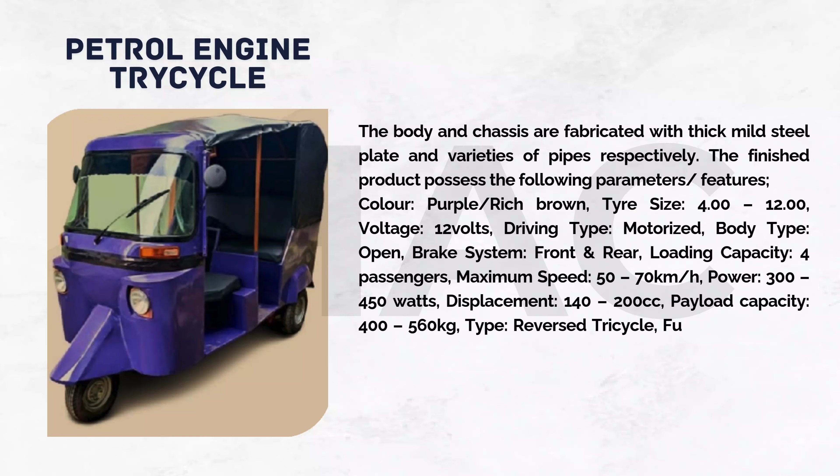Color: purple rich brown. Tire size: 4 to 12. Voltage: 12 volts. Driving type: motorized. Body type: open. Brake system: front and rear. Loading capacity: 4 passengers. Maximum speed: 50 to 70 kilometers per hour. Power: 300 to 450 watts. Displacement: 140 to 200 cc. Payload capacity: 400 to 560 kg. Type: reversed tricycle. Fuel tank: 15 liters, etc.

Belt conveyor machine. Production line in most industries involves transporting a product, component, or part from one location to another, especially over a relatively short distance. The stress and financial implication of manually executing this task by human is completely phased out with the introduction of conveyor machine. It is stress-free, time-saving, and highly conservative in terms of manpower. This machine is fabricated with mild steel angle iron, fiber belt, pulley, galvanized round pipe, bearing, etc. Its choice of prime mover, either electric motor or petrol engine, depends on the user.

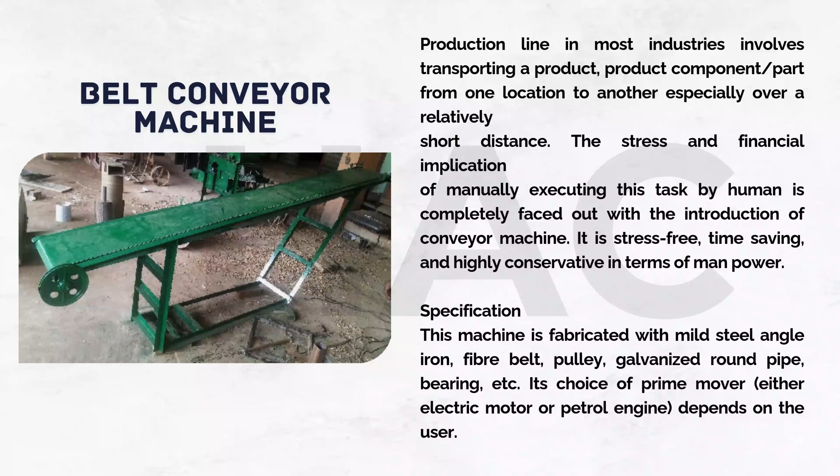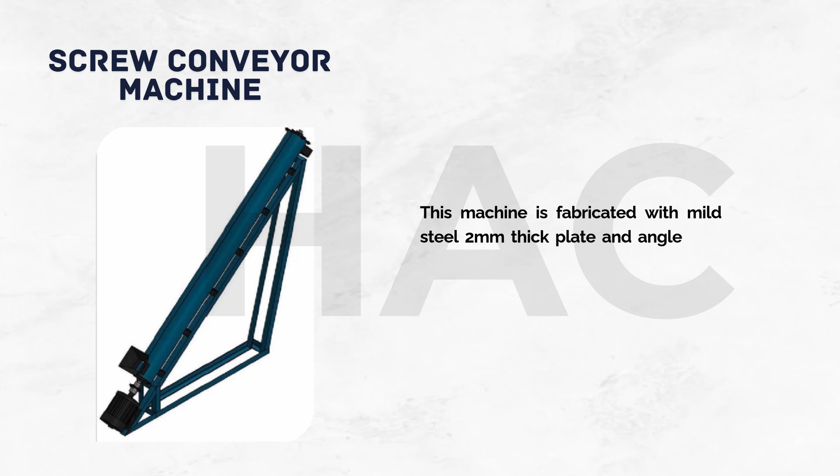Screw conveyor machine. This machine is mostly used to convey granulated material from one location to another in the production process. Its principle of operation is similar to that of the belt conveyor. The major difference is the type of material being conveyed and the conveyor mechanism. It reduces the stress of manually conveying materials, thereby improving productivity at large. It conserves manpower, saves time, and is equally stress-free. This machine is fabricated with mild steel, 2 mm thick plate and angle iron, coupling, long shaft, bearings, etc. It is incorporated with a low-speed electric motor.

3D printed case. 3-dimensional 3D printing is an additive manufacturing process that creates a physical object from a digital design. The process works by laying down thin layers of material in the form of liquid or powdered plastic, metal, or cement, and then fusing the layers together. 3D printers are primarily used to quickly create product models. This is basically used for creating prototypes and models, thereby reducing our dependence on imported products. Made with 2 mm PLA, ABS, PETG filaments.

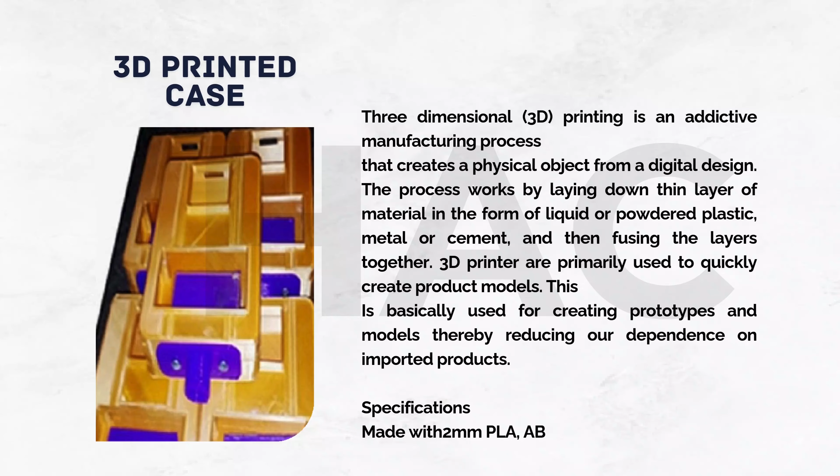School of Agriculture and Agricultural Technology, SAAT, Department of Horticultural Technology.

Improved hybrid crops or seeds from the Department of Horticultural Technology are superior to local ones sold in the market because they are better adapted to the local climate and have resistance to pests and diseases. They are also more attractive because they have higher yields, better quality, and longer shelf life. The department is presently working on producing improved hybrid seeds that will meet consumers' demands for high yields.

The department will focus on the production of improved vegetable crops such as watermelon, cucumber, tomato, pepper, okra, onion, amaranthus, etc.

The ornamental plants presently available in the department are for practical purposes only, while the hand-operated mower and slasher are used for lawn and turf maintenance as practical lessons only in the department, but can be displayed as exhibition equipment if the need arises. Commodity available: budded citrus, quantity 5, price per unit determined by market forces.

They are also more attractive because they have higher yields, better quality, and longer shelf life. They also thrive in various kinds of soil.

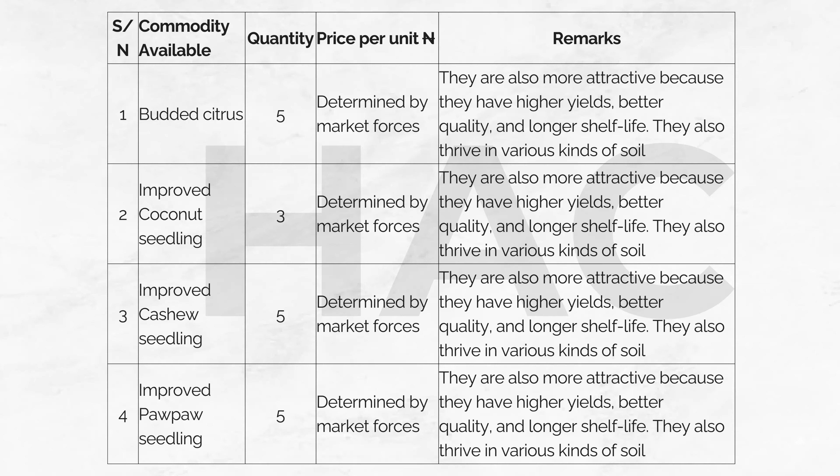Improved pawpaw seedling, quantity 5, determined by market forces. They are also more attractive because they have higher yields, better quality, and longer shelf life. They also thrive in various kinds of soil.

Soursop seedling, quantity 5, price per unit determined by market forces. They are also more attractive because they have higher yields, better quality, and longer shelf life. They also thrive in various kinds of soil.

Improved plantain suckers, quantity 20, price per unit determined by market forces. They are also more attractive because they have higher yields, better quality, and longer shelf life. They also thrive in various kinds of soil.

Improved mango seedling, quantity 5, price per unit determined by market forces. They are also more attractive because they have higher yields, better quality, and longer shelf life. They also thrive in various kinds of soil.

Department of Agricultural Technology: the animals and animal products raised here are superior to local ones sold in the market because they're selectively bred for their meat, eggs, and milk. The improved broilers, goats, pigs, rabbits, and snails have better growth rates, are healthier, and have better immunity to diseases. The products sold are more nutritious because they contain higher levels of nutrients and protein.

The live and smoked catfish sold in the Department of Fishery Technology are superior to local ones sold in the market because they're selectively bred for their meat and have higher meat yields and better taste. They are also healthier because they're grown using sustainable and organic methods, and provide feed benefits for animals and organic manure for crops.